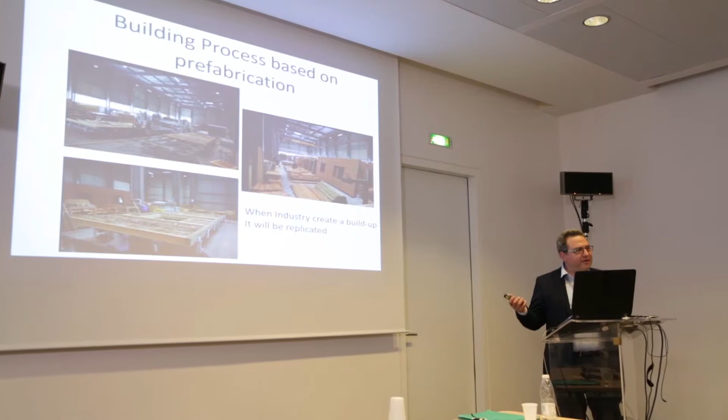So building with wood is also a matter of prefabrication. You have machines that could build the walls, the floors, and so on, prefab. And from one kind of build-up, you can get a replication, and this is very easy for fabrication, but also for characterizing one type of build-up. Okay, so this is our work in 20 years.

Wood was more or less used for single houses, and this is about acoustics. For a single house it's only a matter of noise coming from outside, at a very small level and not in an urban area. Then in the mid 2000s we started talking about multi-family houses and also terrace houses. And now we're turning to making high-rise buildings. Of course, everything is mastered, under control. Voilà.

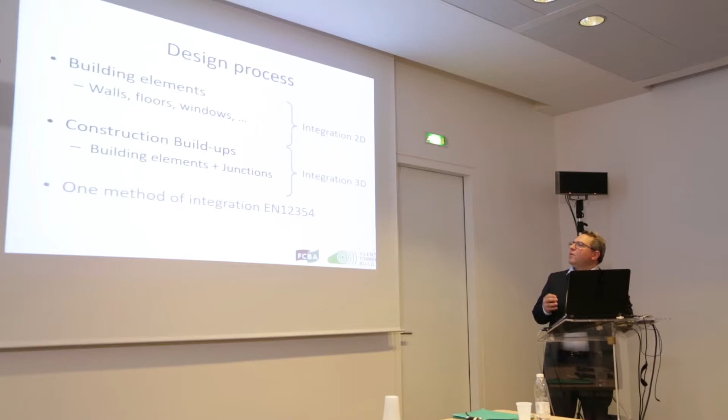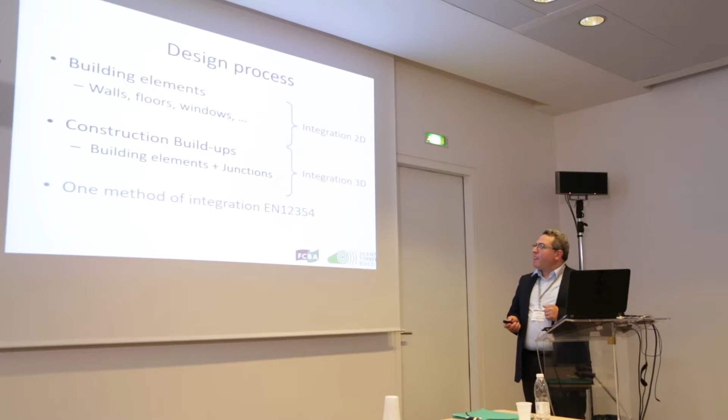So the design process. What is the design process? We start with a 2D level and then a 3D level. At the 2D level, our knowledge in construction is about wall, floor. Everything is tested, and we just mix material and make an integration in 2 dimensions. And from that 2-dimensional integration, with the only method for integration in acoustics, the EN 12354, and with the knowledge of junctions, we can turn our model into 3D.

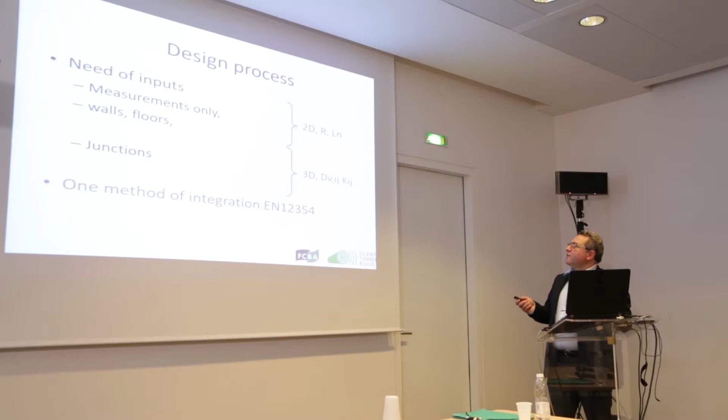So from walls, you get the sound transmission loss, and impact noise performance for floors. And from junctions, you need to measure the vibration reduction indexes, the Kij and the Dvij. And also, of course, the method is the one explained in the model that we call the Gerretsen model, or 12354.

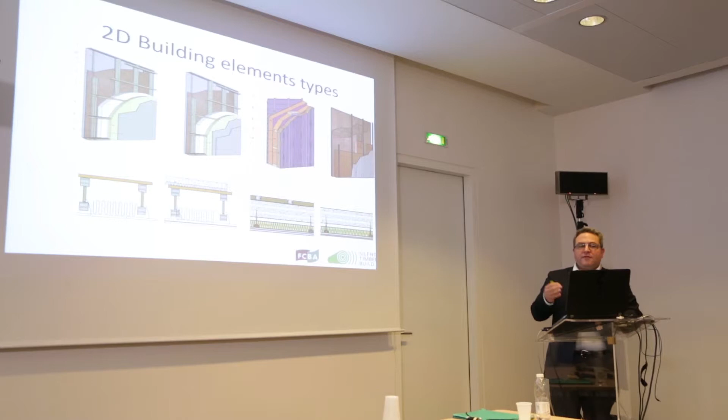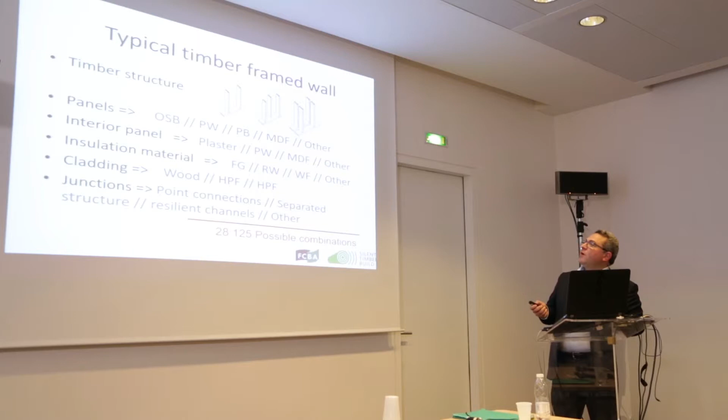Okay? So, we were talking about series of types of construction. Here is the biggest problem in the industry for wood. From only one wall, let's work on how many kinds of wall we can build. For one type of wall, you can choose different kinds of structure. You can choose different kinds of panels on one side and panels on the other side. You can fill it with fibrous elements. It can be glass wool, rock wool, wooden fibers, cellulose and others.

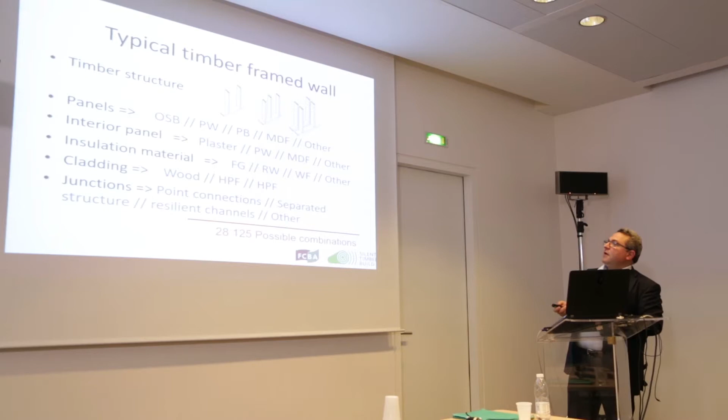The wall can be coated with cladding for the exterior, plasterboard for the interior. And also the junction inside the wall can be of different kinds. It can be a point connection, nailed. It can be a separated structure, can be resilient, using metallic resilient channels and other kinds. So if you add and multiply all the configurations that you can get here, you get a lot of possible combinations of walls.

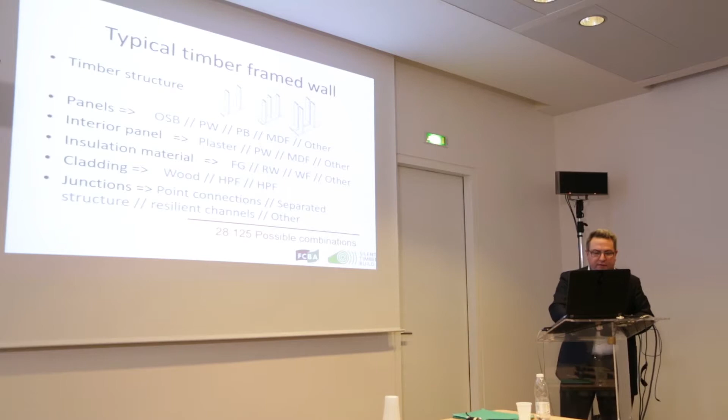And if you are selling and opening this market to your clients, then you have to, for today, measure all the kinds of performance of those walls, and this is of course not possible. So, what to do? So, of course, we copy the others. We go to the people that are performing nice performance.

So we copy our competitors, not really, our friends, and then we can also make some trial and test. This is for, let's say, industry. Of course, this is risky. The other side is, let's see what the scientists are doing. They can also copy, no problem. But they are working on calculation methods. And with those calculation methods, it will never work if we don't get any agreement within our community, okay? And from that, we will get a new generation in construction.

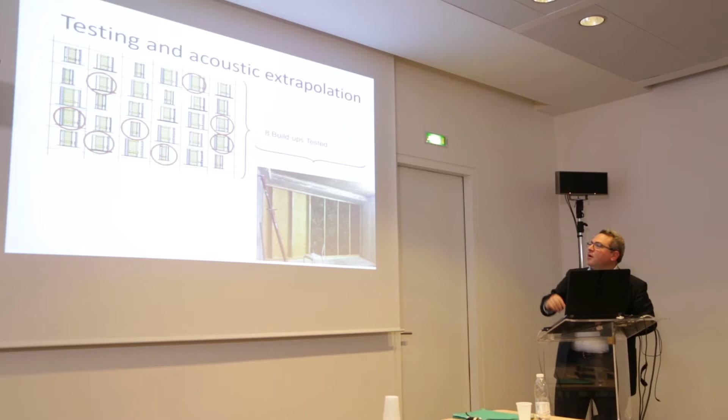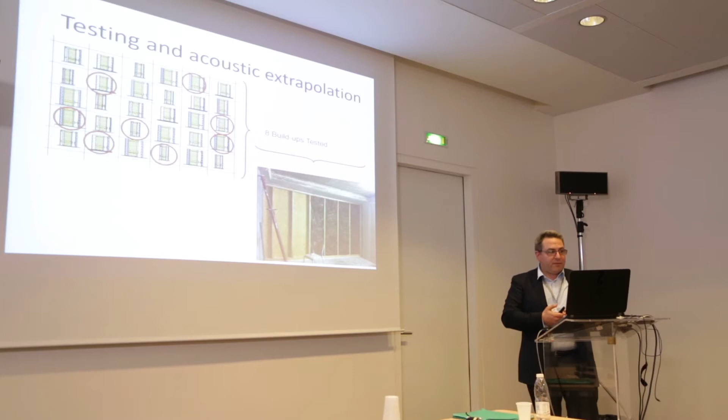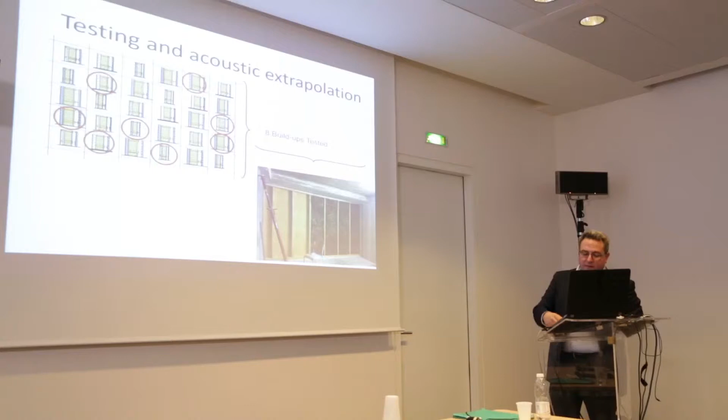So let's see here a normal wall, let's say it's a prefab system, it can produce whatever on the surface, and from only one type of structure, he can get, I don't know how many systems. And all of this has to be measured. So here is the lab, okay? Imagine if you have to try all those, then it's really a peplum, a lot of work. So, for instance, for an industrial person, we can just tell him, okay, you come, you measure a few, and then from that, we will extend the performance with some calculation modeling.

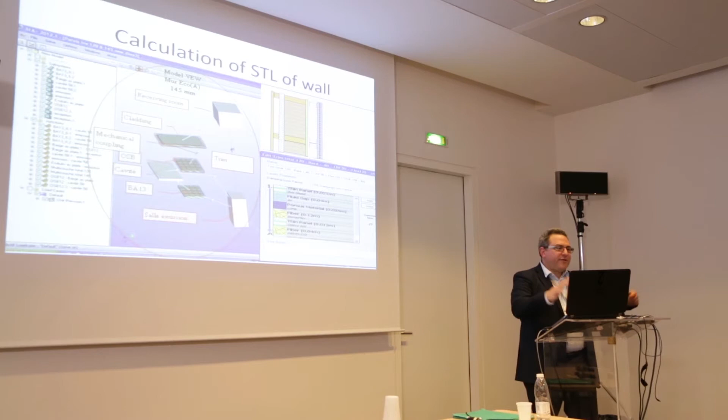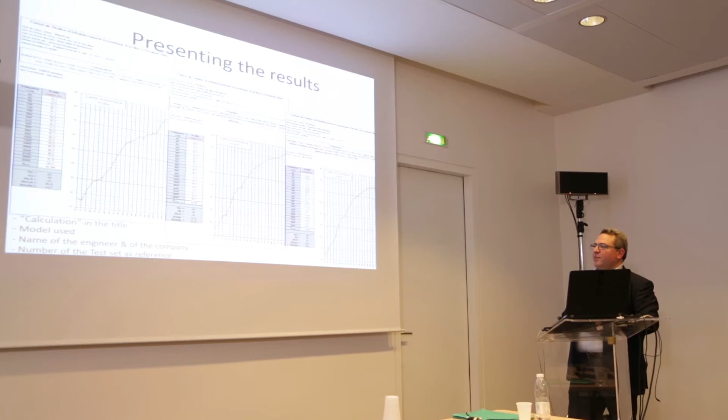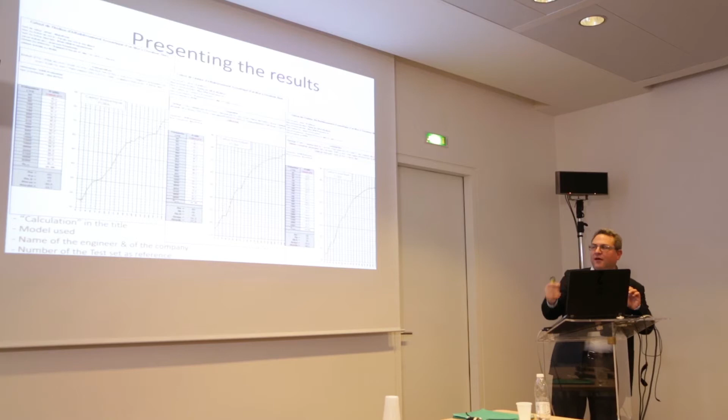We can extend your number of setups into a wider range, okay? And with our calculation method, we just calculate new performance from the measured one. So, measured, calculated, the difference in between, we set it as a reference, and then we calculate something that we didn't measure, and then apply the difference on top of it, and we get this kind of curves. And we give it to the person, and he's happy.

So, what are the lessons learned from the past? Of course, this kind of approach in calculation is very nice for industry, and it opens capacity for being more competitive for the wood industry. Okay, so the lesson learned is that acoustics is predominant as a design criterion. Of course, we heard this more than one time today. Also, the acoustic design has to start at the same time as all other criteria. You cannot make every detail of your construction and say, okay, please now tell me that it's okay in acoustics. No, everything you do on a structure has an influence on acoustics, especially for mechanics.

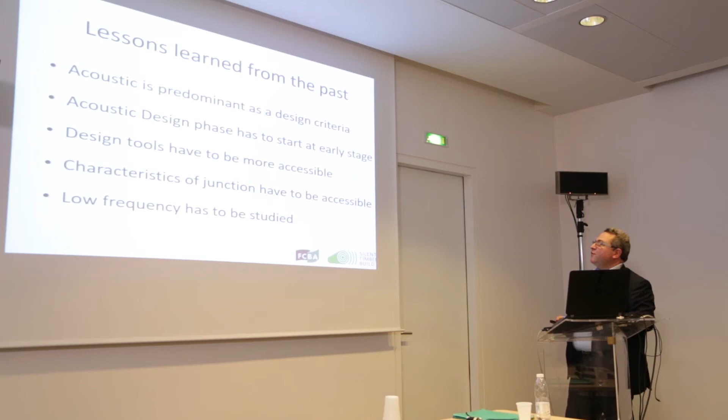Junctions, inside the construction. You cannot decide from one day to the other, this is going to work in acoustics. It never worked. Okay, so you have to invite an acoustician into your team. Yes, and another very important thing is that the design tools have to be more accessible to the engineers. Today, it's very confidential. We want it to be democratic. Everybody can make calculations, and with a little bit of training, the other acousticians will agree with him, and we can also make a confrontation between calculation and testing, and make prediction easier.

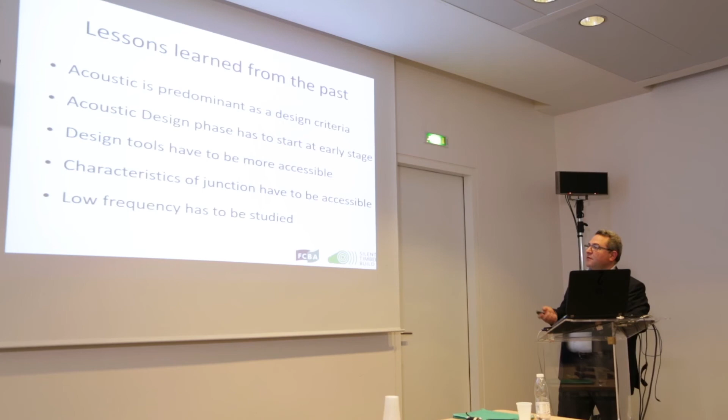Okay, also part of things we cannot predict for the time being. We will work on that, maybe in other projects in the future. How to predict junctions, and this we still have to measure. Okay, and make a database of measurements.

So we are focusing on energy. When you build, this is the bet: when you say, okay, I'm building energy efficient things, if you build it, you save money, okay? And you save the planet. Oh, that's cool. First time you're stingy, and even you save the planet. It's incredible. Okay, and why not then? So we did it, and we are doing it very easily. And then if you ask an acoustician, okay, now I'm going to build acoustic efficient. Is there any money I can win?

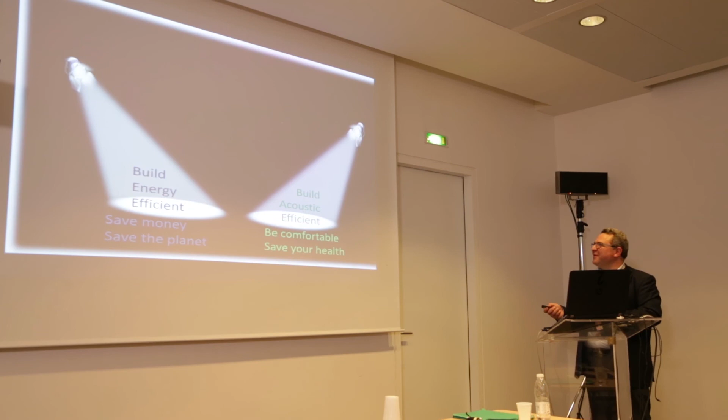Yeah, well, no. If you build acoustic efficient, then you will be more comfortable, and you will save your health. So yes, you will save money. Of course, you save your health. So if we are only comparing things with money, then okay, energy is very easy to understand. But acoustics, of course, is very important, and moreover, it's about your health. So what else can be more important than our life? And that's it. Thank you for your attention.